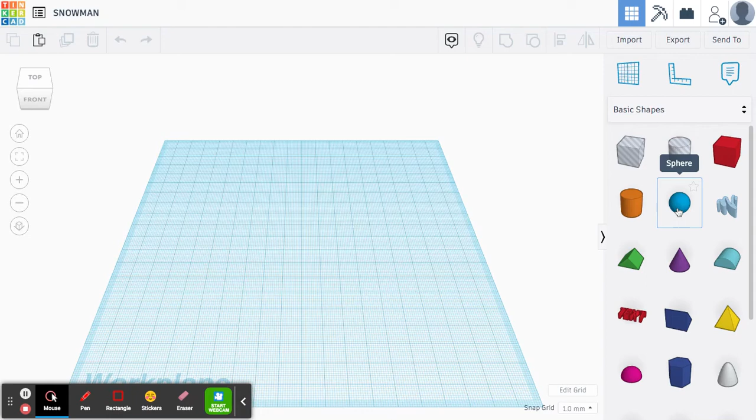All right, let's make a snowman. So obviously for a snowman, we're gonna need 3 spheres. Depending on the size you want to make it, I'll make one 40, 40, and 40.

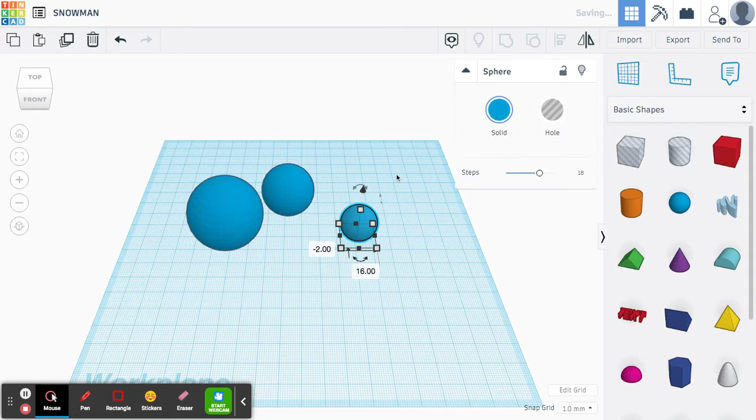Okay, and then I'll make another 30, 30, and 30. This is an interesting one because there's a couple little nuances about what's printable and what's not about what we can do here. So everything looks fine so far.

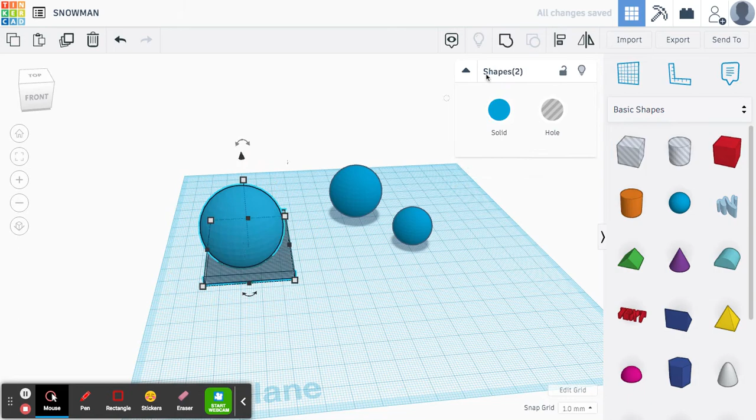One thing about the base is it's very hard to print a sphere because not much of the actual sphere is touching the plate. So a little trick you can do is take a box that's a hole, make it nice and short, maybe just 4, make it really big, and put the sphere on top of it. Then when you group it, you'll notice the bottom of the sphere is now flatter. So it still looks good, but now it's very easy to print because a lot of that sphere is touching the plate.

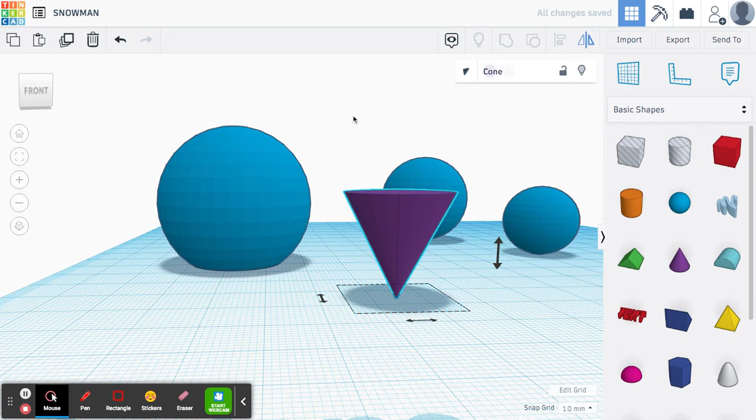So if very little is touching the plate, like if you were trying to print this, it would be very difficult because only such a tiny little part of that cone is touching the plate. So you want a large amount of surface area touching the plate. That's why flattening out the bottom of a sphere is usually a really good idea with printing, because it makes the print a lot safer.

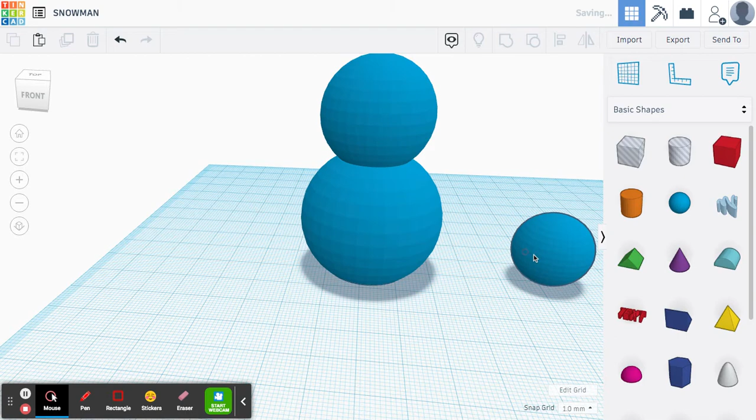Okay, so I'm going to take this sphere, the next one, and lift it up. Let's say that one was 40, so I'll bring it up 40 — it was actually a little less than 40 because I shrunk it, but then we're going to align that and group. Then I'll take this sphere and bring it up. Some of this is really just kind of eyeing it up and seeing what looks best. So let's see if this height looks okay.

Yeah, I think that's a good height. So I'm going to take that and group all this stuff together, and it's all perfectly aligned. This is where the align tool is really valuable.

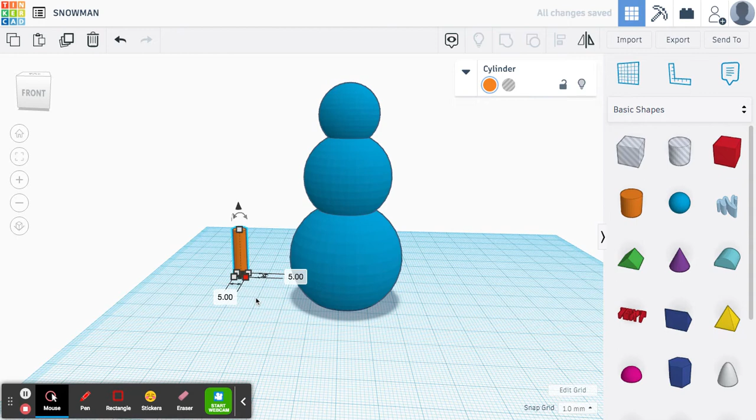Okay, that looks great. Now the next thing we'll make is maybe the arms. So let's say it's 20 by 20 right now — that's way too big. Let's say it's going to be 5 by 5. All right, this should be fine. I'll maybe make it a little longer, 25, but that's up to you.

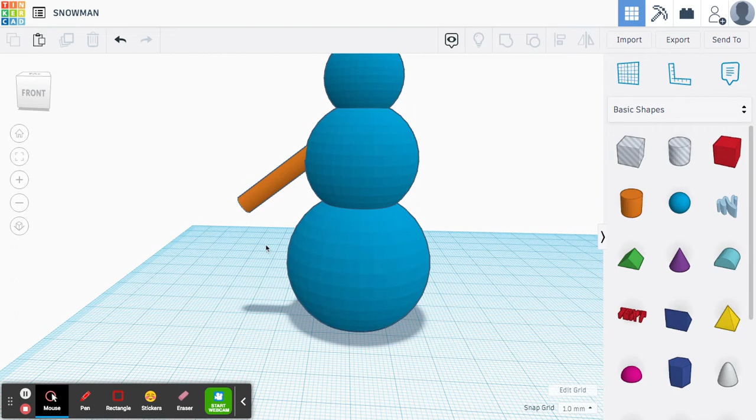Now, one thing you can't do with the arms is this — this is where angles really come into play. You can't make the arms like that. If you did, it's not printable, because this arm needs to have something underneath it to print. So right now, when you try to print, this part of the arm won't work.

So a little cheat you can do is make the arms go into it like that. You'll notice now this will work, because when the 3D printer starts printing this part of the arm, it'll be going up, and up is safe because it'll have something to hang on to. So these angles are really what you want to see — that's something that is printable.

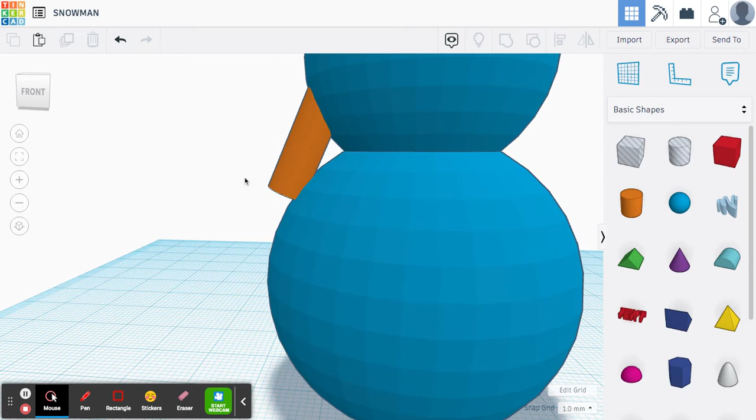So, good. I'm going to make sure that's aligned — I might have moved it a little bit. You kind of always want to make sure everything's aligned. Good, you notice it did move a little bit. I'm going to take this and copy paste it, so now there's another one. I'm going to group these together.

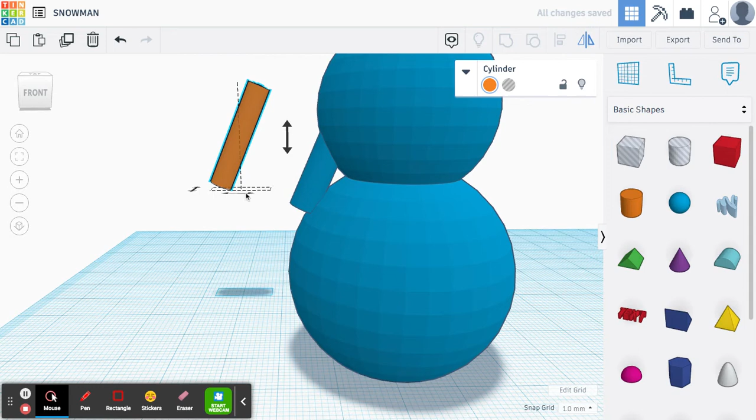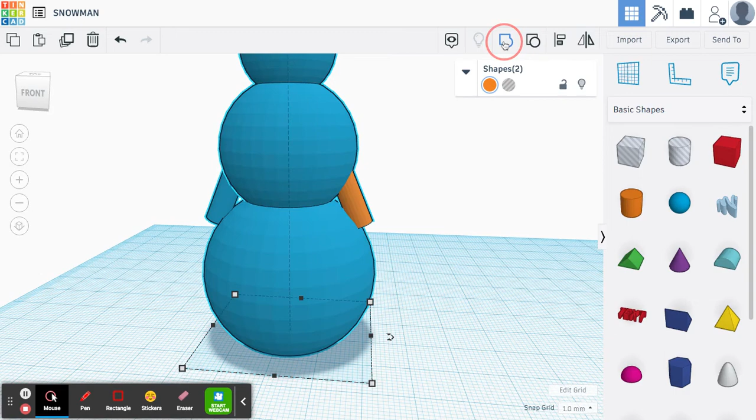Now I'm going to take this — there's probably a way to flip it. Yeah, I'm just going to rotate it like that, might be easier. Same thing, I'm just going to push it into the other side. So you can tell that they're arms, but they're safe to print. And that looks pretty good. I might push it in a little bit more like that. Is that good? Sure, that's fine. Okay, excellent, so we have arms.

Now, the next thing we can think about doing is buttons. So with buttons, you can just take these little spheres — we'll make them really small, maybe just 5 by 5 by 5. Probably even go a little smaller.

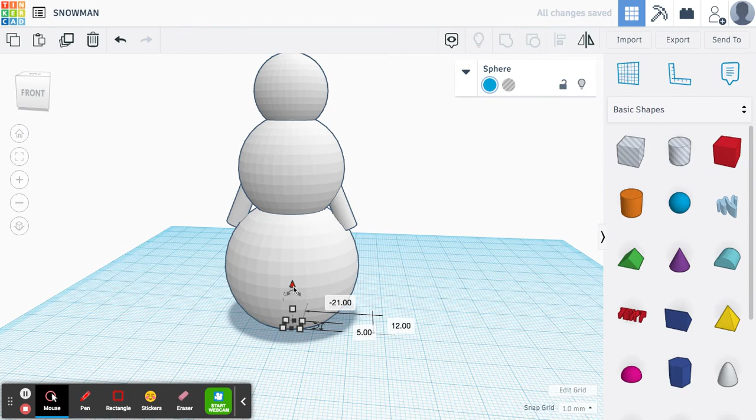All right, so these buttons — let's say we're going to put one button on here, and I'm going to put 2 buttons. This is where your use of the arrows will help, because you can kind of get them up how you want, and then you can move them. I'll continue on the next video.